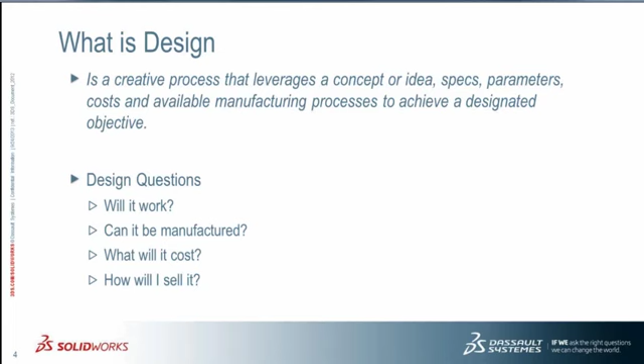So these are my 5 strategies for better design. Number 1: capture design intent.

It's very important that you capture every bit of information as you go, as you create your model. Simulate your performance - how do you know whether or not the part is going to function properly? The best way is to use many of our simulation tools.

Cost of manufacturing should be something you think about whenever you create every feature. I think there are a lot of experienced people out there for whom this comes naturally, but SolidWorks has great tools for junior designers and engineers who don't have that experience. If you've ever been dragged out into the shop by a machinist and asked how you're going to cut this part, or how much it's going to cost, you gain that knowledge real quick.

Refining your product - I think change is good. A lot of people have problems with change in other parts of their lives, but change when you're designing is really a good process. You need to continue to refine and iterate your design, and you come up with much better products.

One of the benefits of 3D design with SolidWorks is that you're able to quickly make design iterations, but you also need to manage them. So you need tools that allow you to manage that, and we do that with SolidWorks Enterprise PDM.

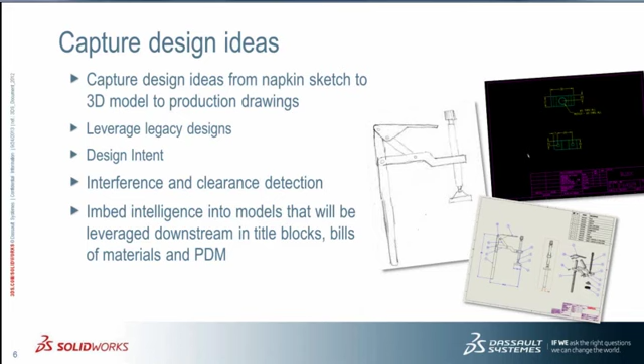All of your mechanical properties are all available there. Leverage that type of information, like description and numbers, for bills of material, title blocks, and PDM. Put it in once, use it many times.

So let's talk a little bit about design intent. Design intent is the arrangement of features in a part such that downstream changes react in a predictable and flexible manner. Pretty straightforward, but you have to think about how you want your part to behave. It's also something you need to consider when working in assembly - part-to-part relationships in assemblies is also important, and part of design intent.

Some questions you should ask as you're designing a part or an assembly: Should a hole stay centered on a part? Should it remain a fixed distance from a certain face or edge? Should it move with other features?

You've got to really think about all the possible changes that might come down the pipe. You're never going to get them all—trust me, you'll never get them all. But the more you build your model to behave as you intend, the better off you are.

This is very important: design intent does not have to match your manufacturing dimensions. It can—some people choose to do it that way—but I think what they do is limit a little bit of how their parts behave when they want to make changes. So your design intent dimensions can be different from your manufacturing dimensions, and we'll walk through that.

These are concepts that really aren't applicable in 2D. It's not something you do. In 2D, you're laying lines and arcs that represent your parts. In 3D, you're actually modeling parts and putting parametric intent into them.

So let's do a quick little demo and show a little bit about what we're talking about. Since Cliff was only giving me 22 minutes, I've already chewed up 9 of it, so we're just going to do a little bit of work on this little tooling clamp for our miter saw. It's a quick release clamp that allows me to get my workpiece in and out real quick. So let's jump over to that one.

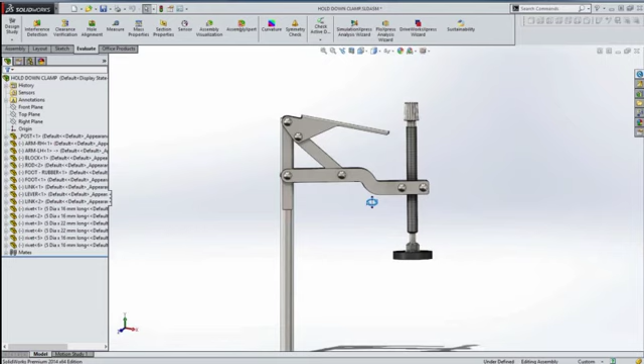So this is our design—pretty simple, pretty straightforward. Kind of move things around, and you can see how it would behave. Let's talk about how we started.

One of the most important things with using a 3D tool is collision detection—interference and collision detection. We have interference tools which are great, but collision takes it to the next level because it allows me to move my item through its range of motion and actually see how it's going to behave in real life.

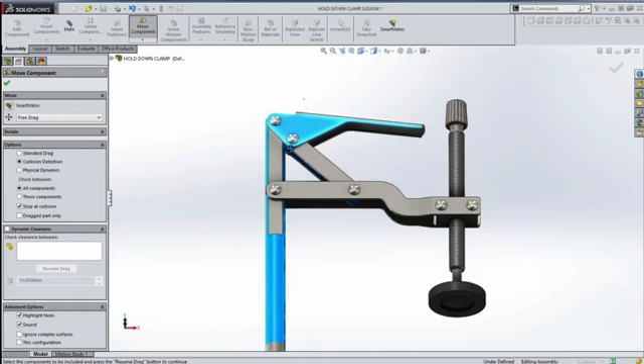So as I move my model through here, you can see that when I come down here, I actually get a collision—these faces here that are highlighted in blue actually collide. Now that's tucked back in there around the round part of this part here, and that's something I really probably wouldn't have found in 2D.

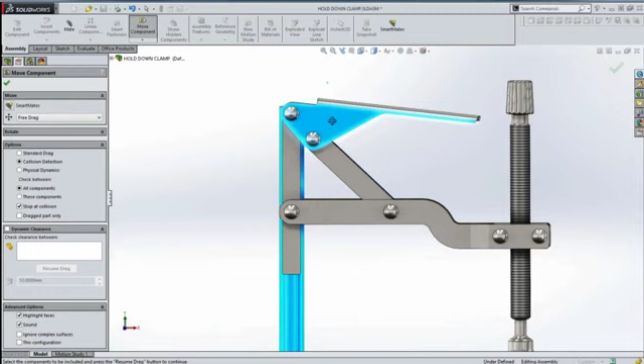It's not something you can see, and obviously this is a very simple example here, but I think you'll realize if you use the collision detection tools and the interference detection tools just how powerful these can be for coming up with valid designs as you're going through—in this case, trying to just understand the range of motion.

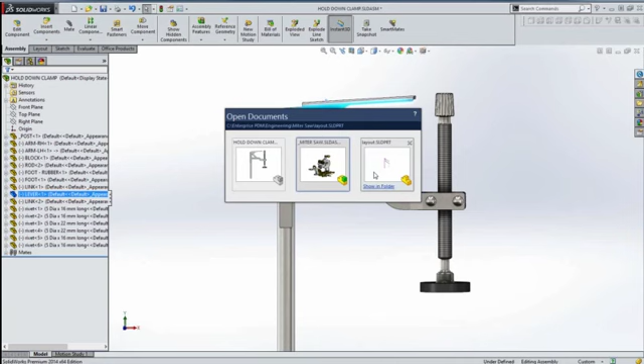So we've got this nice assembly here with my little tooling clamp and everything that I have, my hold down clamp. How did we come up with this? One of the ways you're able to do this is to leverage existing information, and this information was something that was an idea—it was a napkin sketch.

In this case here, all I did was insert the sketch picture into a sketch, brought that sketch picture into a sketch, and scaled it to size because I knew the distance between here and the center line of that was going to be about 140 millimeters.

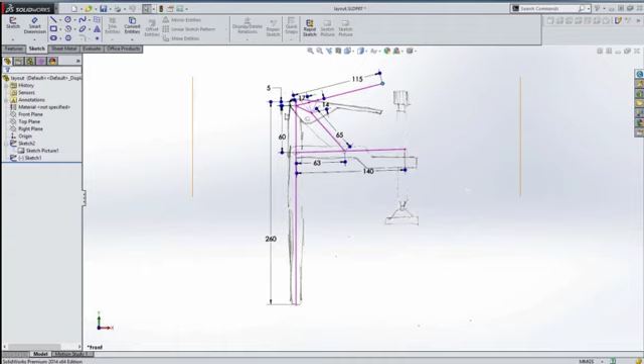Once I had that in there, I was able to create kind of a stick diagram of this sketch right here. So I sketched this out, just trying to mimic the imported sketch picture that I had, and then threw some dimensions on it that made everything behave and work as I wanted it to. So this is the way I wanted it to go.

Once I had these rough dimensions, I was able to go off and start building the parts that I needed to create my geometry. Now I mentioned a little bit earlier that one of the nice things about working in 3D and doing good design is being able to reuse existing information.

A lot of people have 3D information that they can leverage and reuse parts, but not everyone understands that they can easily leverage their 2D information as well.

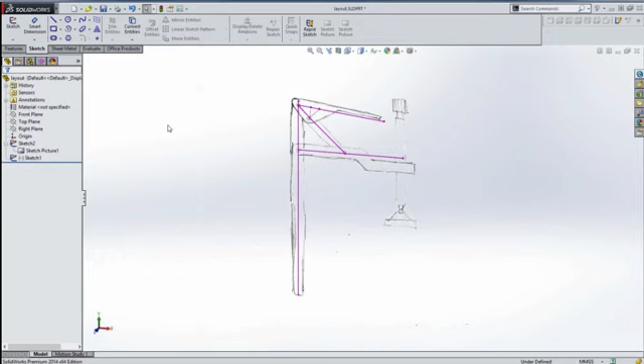So I'm just going to walk through real quick a scenario here where I can leverage an existing 2D DWG file. Now I could open this up directly in DraftSight, but I'm going to choose to open it up straight in SolidWorks.

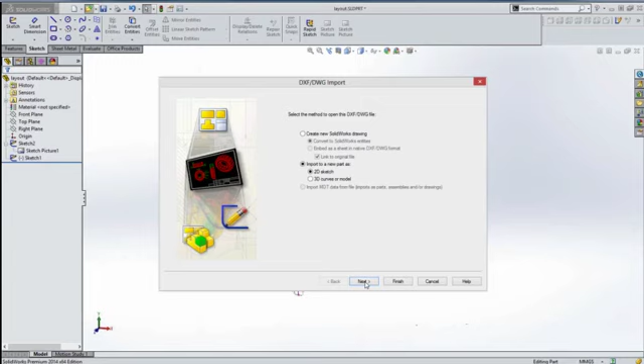DraftSight is a 2D only tool that allows me to maintain existing 2D drawings or create new ones. I'm going to bring this into a sketch, add some dimensions, maybe turn off some layers, and bring that in. So what this does is it brings in what looks to be 2D information, and it is, but it's in a 3D environment.

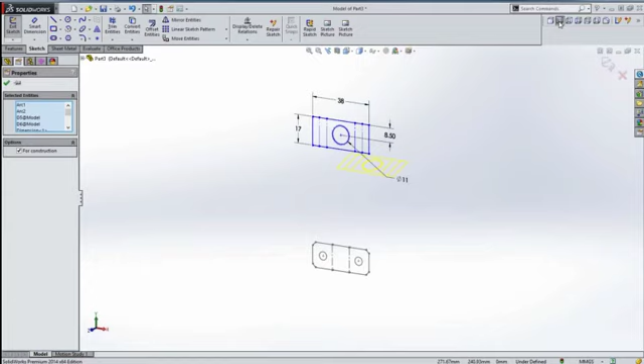So I want this to be my front view and this to be my top view. SolidWorks has some great tools for allowing you to leverage this data. So I'm going to say that's my front - turns gray - and this is my top. Now watch when I hit this button, it'll actually fold down into position.

If I look at it from the side, you can kind of see they're not lined up. Let's go ahead and fix that. We have a great tool to align these two items here. So now when I jump to the top view, I can see that I'm lined up with that bottom view.

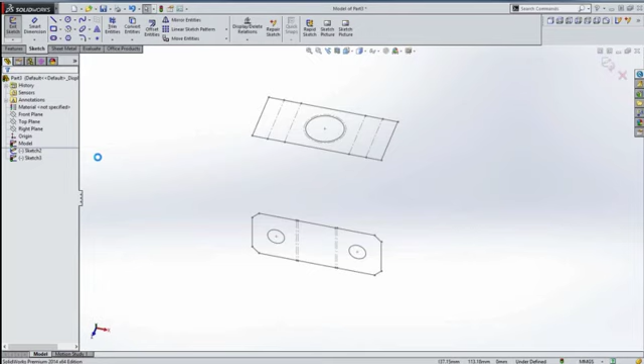So let's turn it into 3D. How do we do that? Let's take this original sketch right here, and we'll extrude it. I can drag it out here, maybe measure that distance of that line to figure out how deep it goes, or just click this item right here, and it gives an up-to-vertex relationship. That's all I need to do to create the first geometry.

Now I need to put a hole on the top up here. I don't know what size it is, so I can just measure this using the SolidWorks measure tool - 12 millimeters. So that's a 12 millimeter tapped hole is what that is.

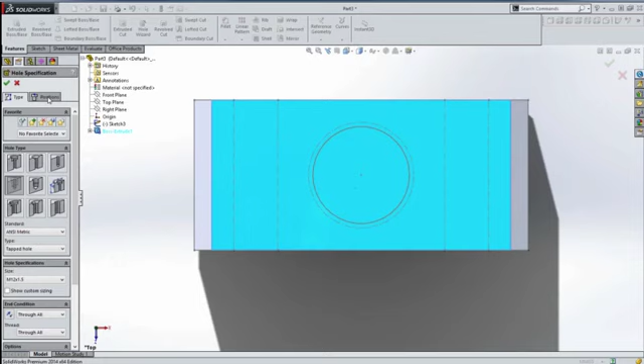I'm going to jump to a top view here. I wanted to line up right there on that point, so let's just go ahead and leverage that point using the hole wizard. I'll call this in my machinery's handbook of all my hole types. I don't have to look up sizes, tap drills, counterbore size, any of that stuff. I have all my standards here, all my different hole types, all my different sizes. In this case, we'll take a 12 millimeter tapped hole, and I'm just going to position it right on that vertex of that existing one there. So I just lined it up with that one, and I'm done.

So there I have it. Just a couple of clicks here, I was able to take and rebuild and recreate that 2D part and turn it into 3D. Now we want to embed some rich content along with that.

One of the ways to do that I talked about is material. So we can choose from a vast library of materials, or these are my favorites here. I'll just go ahead and make that plain carbon steel.

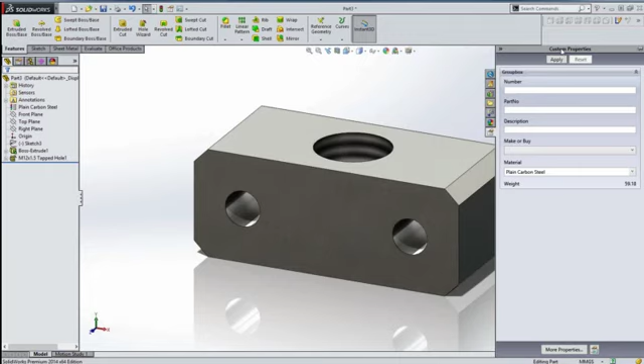You might want to put some other information into this part, like description or numbers or stuff like that. These are just custom properties, and SolidWorks allows us to create a custom interface for doing this. So I can put in whatever I want here, and then put in new block, whether I make this or buy this. All this information is fully customizable.

It already knows what material because it's extracting it out of the part, therefore it knows the weight. So we'll go ahead and apply that. I've added that information to our part, and now we'll just save it. I'll give it a name - call it block 2, something like that.

We want to get this information, leverage our 3D models in drawings. How do we do that? Make a drawing from our part. It's very simple, very easy to do with SolidWorks.

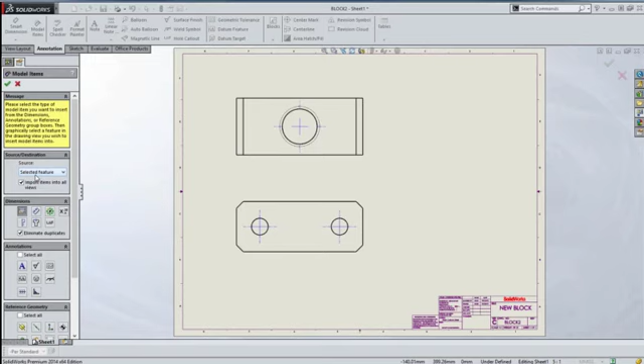Front view, just project up a top view, automatically drops in my center lines for me. If I want to insert any dimensions I used to create the model, I can go ahead and bring those in, or maybe add some additional dimensions here as I go onto my model. So very quick and easy, I'm able to leverage the 3D part and turn it into a 2D drawing that I can then use for manufacturing.

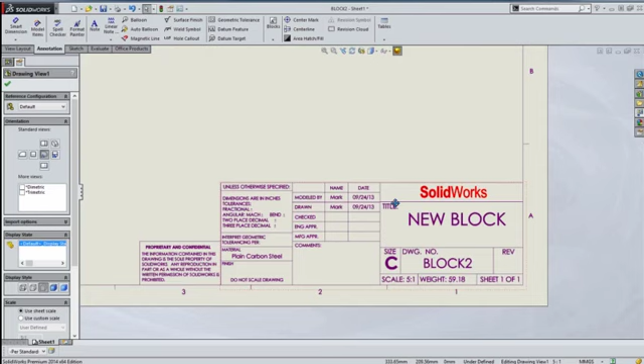Remember, we added some custom properties like the title, new block, gave it a name, all that information.

Its weight is carried across here as well as its material. So you want to customize your templates so they're able to extract this information. You only have to enter it once, at the part, and leverage it in the title block and in the assembly drawings as well.

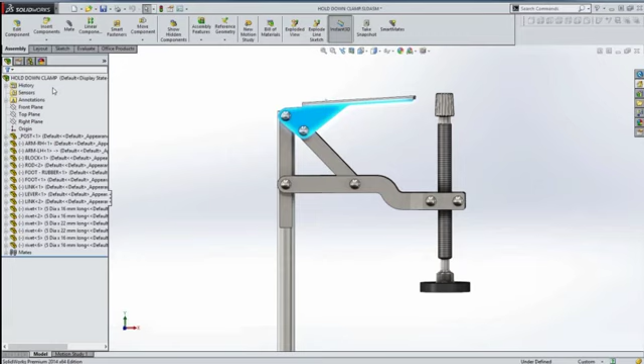Let's take a look at the assembly drawing for this one. So there's our assembly. Let's go ahead and open its drawing, which has all the information from that assembly we had.

More importantly, all the information that was typed in about each part gets done automatically, so I don't have to do anything here. This bill of material is generated automatically for me, and it also comes up with a quantity as well. It's kind of a nice capability.

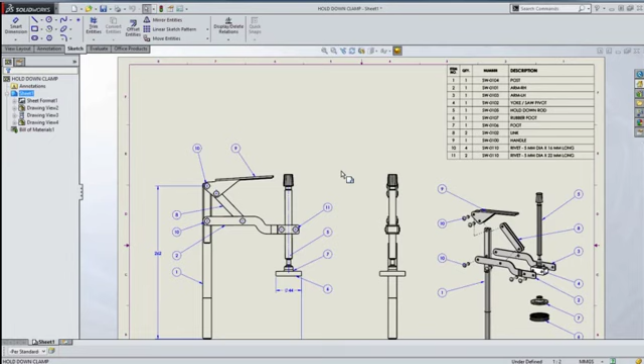Now, one of the other things I talked about was design intent. Let's take a look at this part here and discuss design intent a little bit. This is the exact same part that was in the image in PowerPoint.

So I have this dimension, 140 here, and it goes to this center line. What's that center line? Well, that's the center line where that threaded rod comes through for the hold-down rod.

That's not important for manufacturing, but it's important for my design intent. You also notice at this 24, I have a dimension for the width of those two holes, but I don't locate them from this center line, and I always want it to be centered.

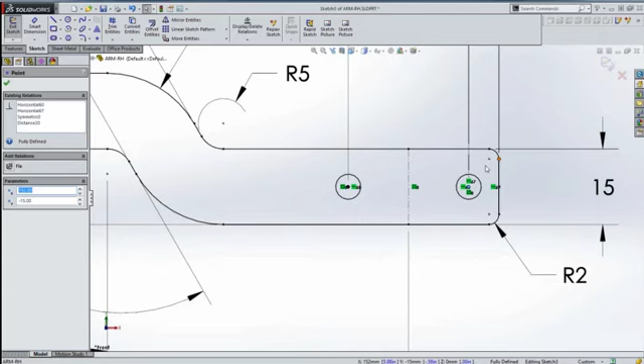If we zoom in here, you'll see there's a symmetric relationship between the center line and the two holes, and as I make changes it grows the way I want. You'll also notice for this one that there's a horizontal relationship between that midpoint and the center of that one, so I don't have to add a dimension vertically to control that. I want these holes to always be centered between those two items, and that way it'll stay that way.

So let's take a look at how some changes might be made. Let's take our 140 and just drag this out. Notice all these holes and the end move with it, because of the way I have my design intent captured here—the 6 millimeters, I need always 6 millimeters from the end. So I can set this back to 140, something like that.

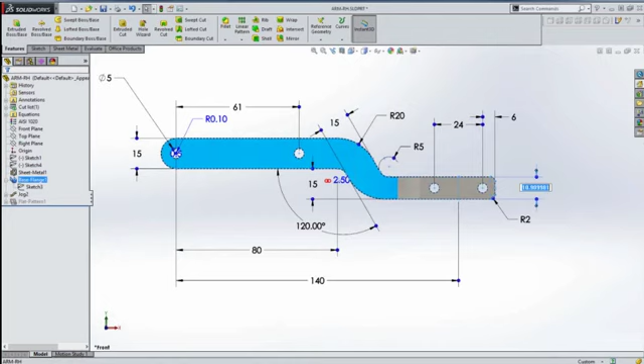Likewise with this 24, I can go ahead and change that and bring it however I want. We'll undo that change—oops, that's fine. And then this one here, remember my design intent was to keep that hole centered about that boss. It's very quick and easy for me to do that as well. So those are my design intent dimensions, the information I wanted captured for design intent.

But for manufacturing, they need different information. They don't care about that center line—that's a theoretical center line that doesn't mean anything to them. So the important point is don't force yourself to compromise your design intent just for manufacturing, because you can always add these manufacturing dimensions down the road.

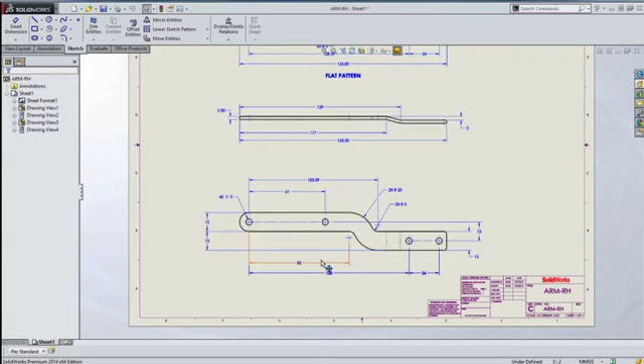In fact, since this is a sheet metal part with a little jog in it, the flat pattern is the best place to locate those holes anyway, and we'll locate those from the central location, which is the far left hole—everything will be dimensioned from there. So don't worry about letting the manufacturing dimensions control your design intent; use your design intent appropriately instead.

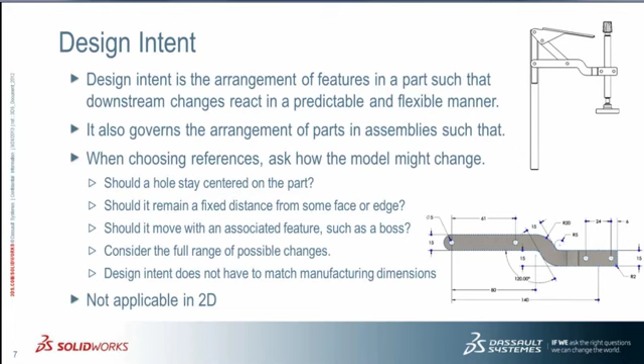We'll go back to our PowerPoint here. So those are just the first topic, which is design intent.

Secondly is simulation. We've got to know how our part's going to function. Is it going to perform properly? Is it going to perform safely? Is it going to fail? Is it going to break?

SolidWorks has many tools: SolidWorks Simulation for structural, thermal, fatigue, and vibration analysis; rigid body motion analysis; computational fluid dynamics; injection molding simulation with SolidWorks Plastics; and even environmental impacts using SolidWorks Sustainability.

So we'll do a quick little simulation, or show you the simulation that I ran on this one, just to give you an understanding of how that goes and how easy that is.

One thing I find with some customers—not all of them, especially from the seminar we did earlier this morning—is that a lot of people are using simulation, which is fantastic because it's easy. But a lot of people shy away from it, maybe because they didn't study enough FEA in school, or weren't exposed to it, or they send their FEA out to be done. SolidWorks provides tools that allow you to do this natively, right inside SolidWorks on your model. So let's take a look at a simulation I ran here.

This is a fairly basic simulation. I didn't do a whole lot—I held this surface down here, and applied a load of 30 pounds over on this side, and then I go ahead and run my simulation.

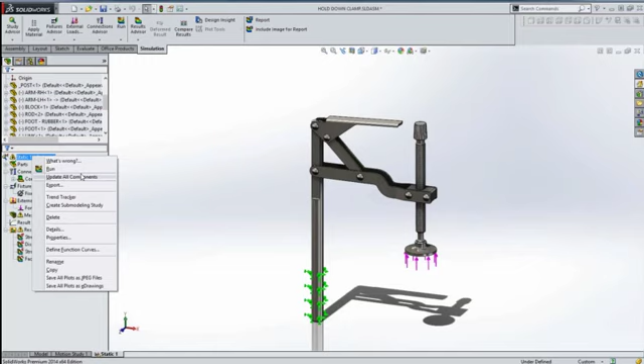The nice thing about this is SolidWorks knows all the parts and all the materials for the parts. It's able to know how those parts interact with each other, and then it goes through and meshes it and runs it. In about 10 or 15 seconds, we'll have done a SolidWorks simulation on this part to understand how it's going to behave under load.

Now what it does is it comes back with my stress information—so these are my stresses. Some people might say, well, I don't understand what those stresses mean in comparison to whether or not the part's going to fail. That's fine, especially when you're listing out stresses and you have parts with different materials, which mean different yield strengths and different strength requirements for each.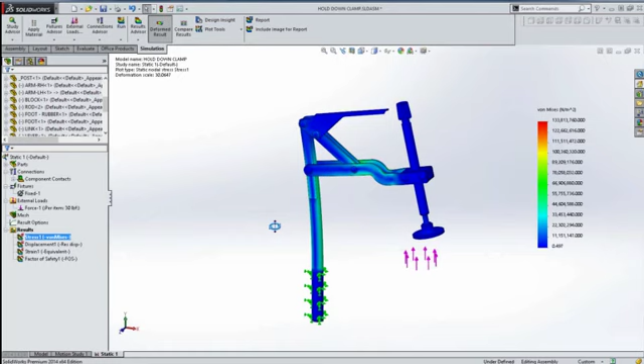So one of the nice ways to deal with that is through a factor of safety plot. Factor of safety compares the calculated stress for each part and its material to the yield strength of that part's material.

So then you come back and it says, okay, here's all my factors of safety—my lowest factor of safety is 1.65. Maybe my design requirement is that this thing doesn't fail below 1.5. Maybe I need to beef things up and increase the strength of some of these parts so it can withstand more load. Those are all design considerations you can take.

But the nice thing about it is that this is very easy to do, and you can do it directly inside of your design environment.

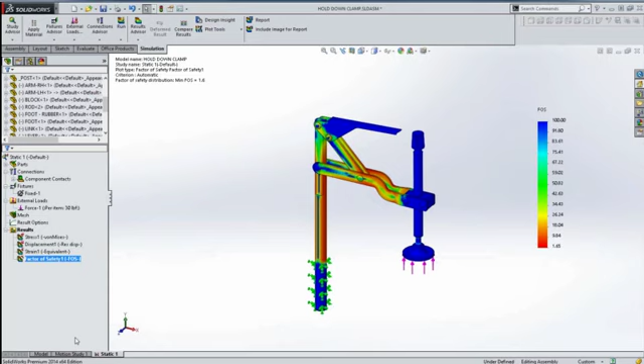For those who aren't comfortable with it, one of the great ways to do it is what I call an A to B study. You take something like this link here and simulate it with one thickness or material, then do it with some design changes, saying A is better than B, B is better than C, and you come up with a better design that way. Those are some things I think everyone should be using the various simulation tools we have available.

Next thing I think you need to think about during the design process—and this is something you need to think about the whole time—is how much this part, model, or assembly is going to cost. How much am I going to be able to manufacture it? Can the shop machine this thing?

If you've ever been dragged out onto the shop floor, you're going to appreciate some of these things, because believe me, it's happened to me.

SolidWorks Costing uses customizable templates to check the costs of your parts, and you can compare those against your targeted costs. The nice thing is you can run through different design iterations or change materials and then compare the costs based on that information. Again, the templates are customizable, so you can control what goes in there—what your machining costs are, what your labor costs are, and so on and so forth.

DFMXpress is designed for manufacturability. It goes through and runs a check based on a certain number of rules that you get to customize, and you get to control what those rules are, but it checks against those.

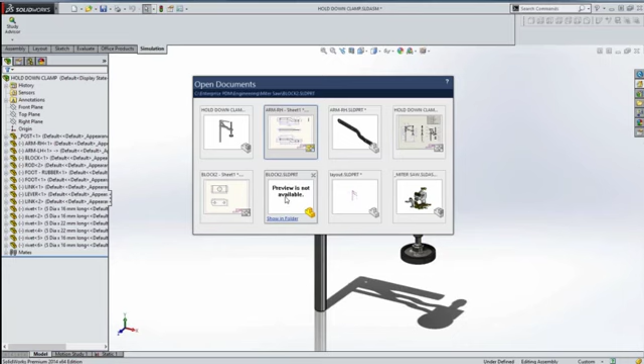So the easiest thing to do is just actually show you how this works. I'm going to take that block I created a little bit earlier, and we'll do some of these evaluations on it. First, we'll do costing—so we'll take this part, and I'm going to choose one of these templates right here.

Not the one I want. We'll choose this metric here, and it's going to come back and give me some cost information. So here's my cost down here, and I can compare current and previous, and I can set baselines and stuff like that.

Material cost is all information that goes inside of the template. I can put my total number of parts here. If I wanted to add additional stock for machining on different faces, I could do that as well.

Based on the information it finds in the part, it calculates the setup operations that need to be done. In this case, I need 3 setups for the different operations. It also calculates load and unload time, because I might need to flip the part over if I'm using a 3-axis or 2.5-axis machine to cut this part.

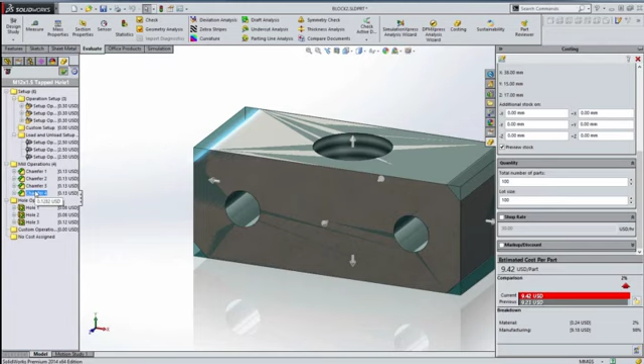Each of the features in the part gets calculated, and it figures out a time and therefore a cost. Each of the holes as well gets its cost associated with it, sums it all up, and gives me a total cost. It's a nice little tool that lets you come up with cost information for your part as you go, and you can continue adding features and comparing the cost as you go.

Now, as far as design for manufacturability goes, we have DFMXpress, which is really just a wizard tool. I run the wizard against this part, and it goes through and compares a bunch of different design for manufacturability rules.

Things like fillets on the outside edges, are they the right size? Standard hole sizes. In this case, hole depth to diameter ratio—it says it failed for two of the items.

It highlights them on the screen and gives me a callout letting me know the depth to diameter ratio is 3.4 where the recommended is 2.75. You might want to change the hole size, or change the thickness of your part to accommodate for that. But at least you know ahead of time these are things that might be watch-outs when it comes time to send this out to the shop to be manufactured.

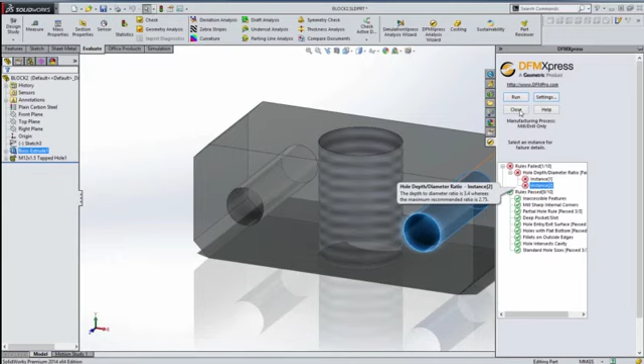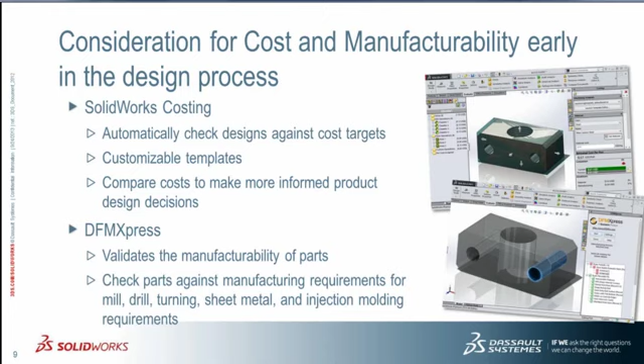So these are things I think you need to think about as you go through. And I think SolidWorks Costing and DFMXpress are great tools for that junior engineer who hasn't had as much design experience as some of the others, or some of the other guys who've been dragged out on the shop floor.

Next thing we want to talk about is refining your product, or change. Change is good—everybody says change isn't, change is hard, but change is good in the design process. You need to be able to leverage good design intent and make robust changes to your model so you can iterate and perfect it. The more you change it, not always, but you can use that change to highly refine your product.

But once you make all these changes, you've got to make sure you control those changes, and we do that with Enterprise PDM. With Enterprise PDM, you can securely store your files. You don't have to worry about version control because Enterprise PDM takes care of that behind the scenes. You always have access to older versions if you wanted to roll back to those.

You want to be able to share, so multiple people working on a project at the same time—different people need different access to different items, but everybody wants to work on the assembly at the same time. So you may not have access to certain parts; they might be worked on by someone else. Enterprise PDM controls that. It also allows you to share information and search for information.

It's been said that engineers spend 20 to 30% of their time searching for information, and a lot of that is spent searching for the right file that they want to use—the right part that they want to use.

With SolidWorks Enterprise PDM search capabilities, it's a very fast way to search on that robust information that you place into your parts. And then finally, workflow to route your designs through a process that your particular company may have. It may be an ECO process, or an analysis process, or a purchasing process. Everybody along that path is going to be notified, and it has to follow certain criteria until it's met.

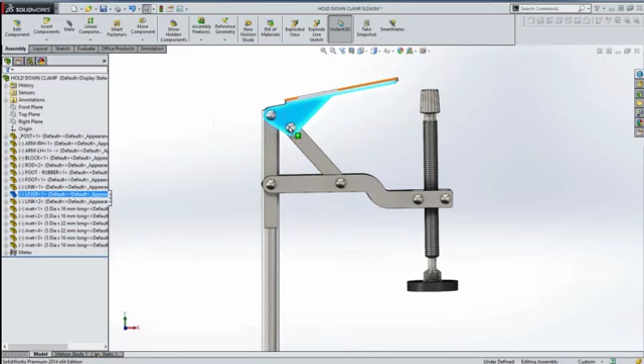So let's talk a little bit about change and workflow and how we might use that. Our part looks pretty good right here, our assembly looks pretty good right here. But maybe what we want is a little bit more range of motion. We want this foot to lift a little higher as we run it through its range of motion. One way to do that is to move this hole back so that distance throws this up a little bit higher.

So what do we do? We make changes. Because we've captured that robust design intent in our model, we can simply click on a dimension like this and make it say 35 millimeters, and rebuild. Well, that's not too good. This link is kind of too long now, so let's change this link, shorten this up.

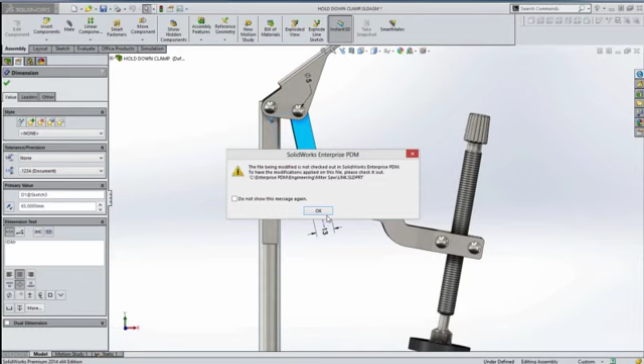Actually, before I do that, I want to point out some things in Enterprise PDM, because I have this part checked out. If I undo this checkout, maybe I don't have permissions to make a change to that part. And if I click on this and try to change it, SolidWorks Enterprise PDM warns me - it warns me, hey, you don't have this part checked out, you don't have permissions to make this change. So at that point, I can come in here, check that part out, and now I have those permissions.

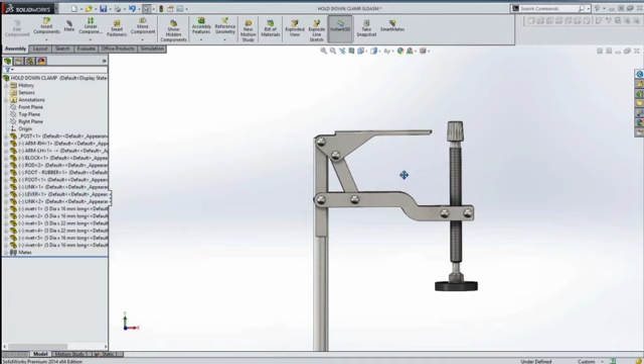So now I can change this to say 50, rebuild our geometry. That looks pretty good for what we want. Now when I lift this up, you can see it lifts much higher, maybe gives me better access to my workpiece, placing my workpiece in my model. So that's pretty good. We talked about Enterprise PDM, whether or not I own parts, and I can then take this part I've made a change to and check it in, establishing a second revision.

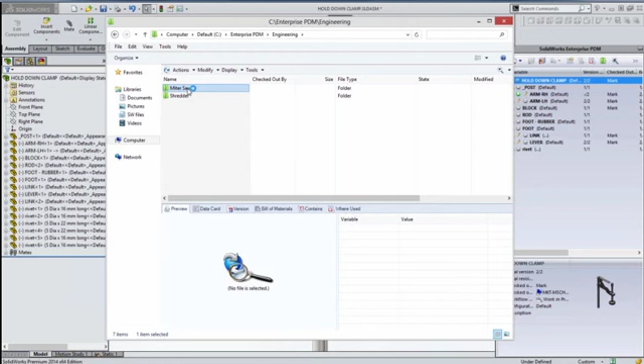Now, another way to look at Enterprise PDM is in the actual vault itself. So what is this Enterprise PDM? What is this vault? It's nothing more than Internet or Windows Explorer. So this is Windows Explorer - everybody's used to looking at Windows Explorer. These are nothing more than folders, nothing more than files in folders.

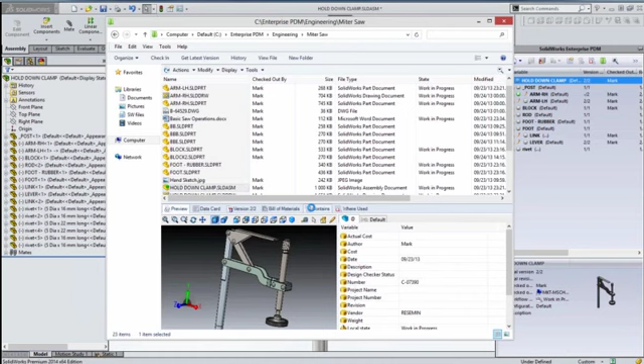I can click on each of these items here and get access to a preview. If I really wanted a deeper look, I could actually access eDrawings and rotate and zoom around to see if that's the part I really want to work with or use. But all this information is available. If I have an assembly, I can see what it contains, what are all the parts associated with that.

If I have something like this part, where is that part used? It's used in that hold-down assembly, and that assembly is used in the drawing. So all that information is captured. Even things like our hand sketch that we used, I can view that with our viewer, but I can check that information in. I might have several iterations of this that I've gone through, and I can have the versioning information captured for that.

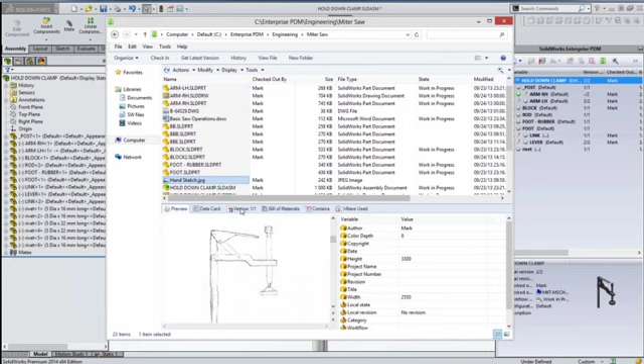Things like a Word document, something like this right here, which is maybe some technical publications that show how to use this particular device - that information can be stored in there as well. So all that information gets captured with Enterprise PDM, and I think everyone should be controlling their information that way.

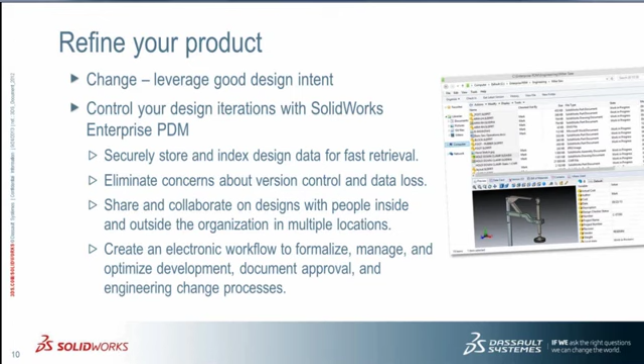Finally, the last thing I want to take a look at is how can you leverage your solid models downstream. That can be for photorealistic renderings, for technical communications like these Word documents, for CAM, for rapid prototyping, and a variety of other things. But you should take advantage of that solid model and use it downstream in those applications.

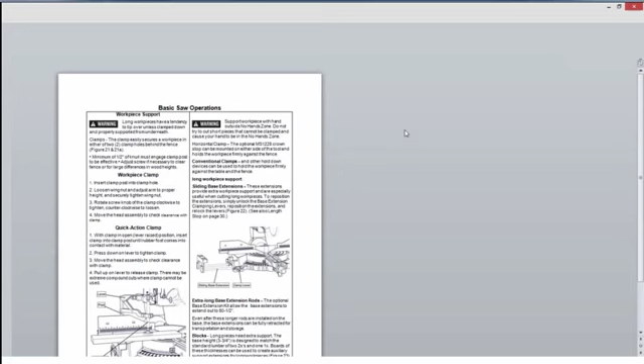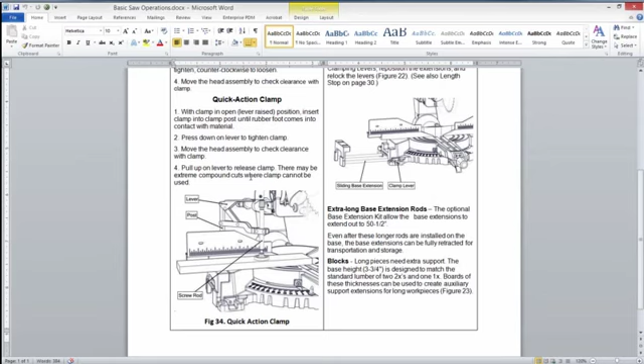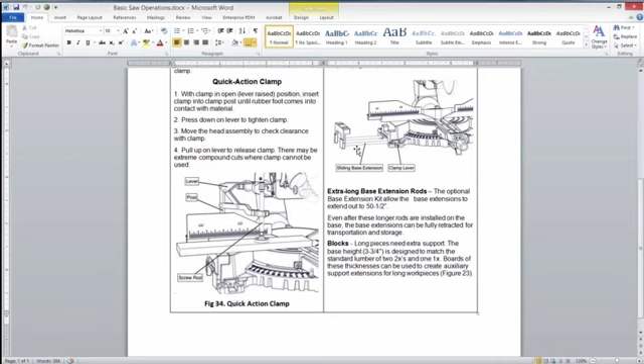So let's take a look at this Word document here. This is obviously Microsoft Word, nothing more than that, but it's a document that might walk through how you might use this thing. Here's the quick action clamp, these are the different items, here's how you use it. You also have information showing our sliding base—you can slide this out to provide more support for your workpiece. So these are images, nothing more than images.

Where do these come from? Well, they came from SolidWorks Composer. Here's another document, which is basically just a parts diagram—those are things you can also create with SolidWorks Composer. So I'm going to open up our miter saw in SolidWorks Composer and take a look at it there.

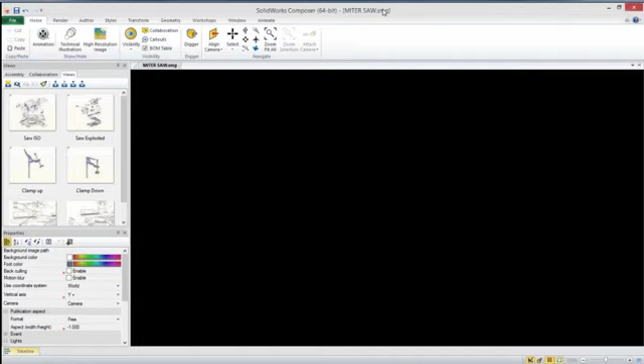One of the things you can do is change the backgrounds, zoom in, zoom out on this model, play around with it, get the right rotation. But all you're doing is creating an image of how you want your model to look. I've created some already here, and these are images I may want to use for my exploded diagrams in a document. Here I might want to show how the clamp works when it's up.

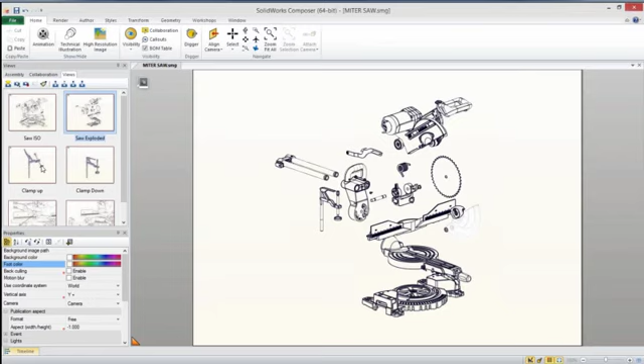And you can see I have different rendering methodologies, all done to match the type of rendering that technical illustrators would use. So I can create just a flat design, I can do the silhouette like some of our other ones, I can do smooth with outline—you get all different types of things.

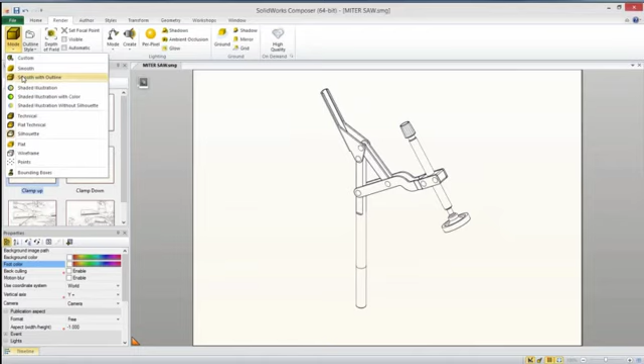But the great thing about this is it leverages that SolidWorks model. It reads the native SolidWorks model and allows the technical illustrator to not have to bother the engineer to say, hey, can I get another view here, can you open that up, can you change this, give me another view. They can create all this content themselves, and it's very simple and easy to use.

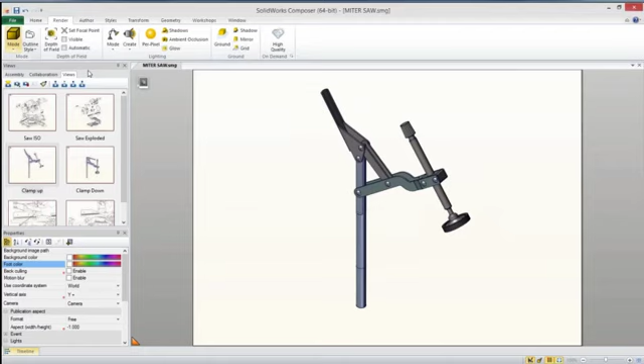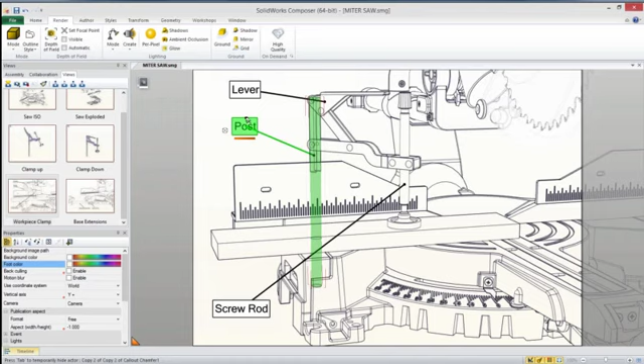Here we go—down here are the two views we created of the miter saw that show how the quick release clamp actually holds a workpiece into place. You can add labels and everything to it, and these can be smart—they can hyperlink to other parts if you wanted. In this case, I'm just creating images. You can explode things and move things around very easily without worrying about messing up the engineer's model. So it's a nice, easy tool to do that.

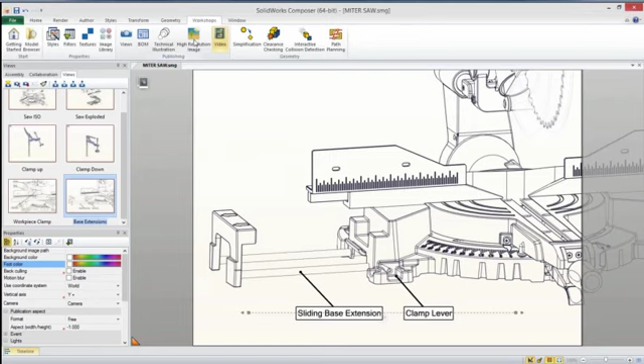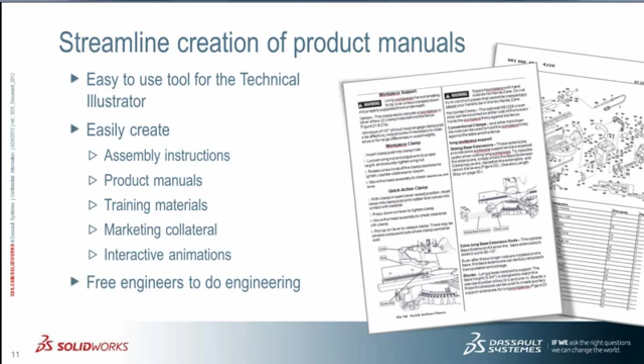When I'm all done, all I need to do is send these out as high-resolution vector-based images, so you get very good, clear quality images you can leverage downstream in Word or any Adobe products to create your technical publications. So some really cool tools to leverage your downstream models with SolidWorks Composer—things like assembly instructions, product manuals, marketing collateral, renderings, and more. And the thing I like most is it frees the engineers to do their engineering work instead of having to work with the technical illustrators to try to get exactly what they want.

So in a short period of time, I ran over a little bit, sorry about that. The key things you should remember: try to capture as much design intent as you can, validate the performance of your parts using simulation tools, consider manufacturability the whole time, and don't be afraid of change—change is good, it's a way to make your design better and more refined, controlled within the PDM environment. And then leverage your model downstream for things like photorealistic rendering, marketing and product manuals, 3D printing, and things like that.